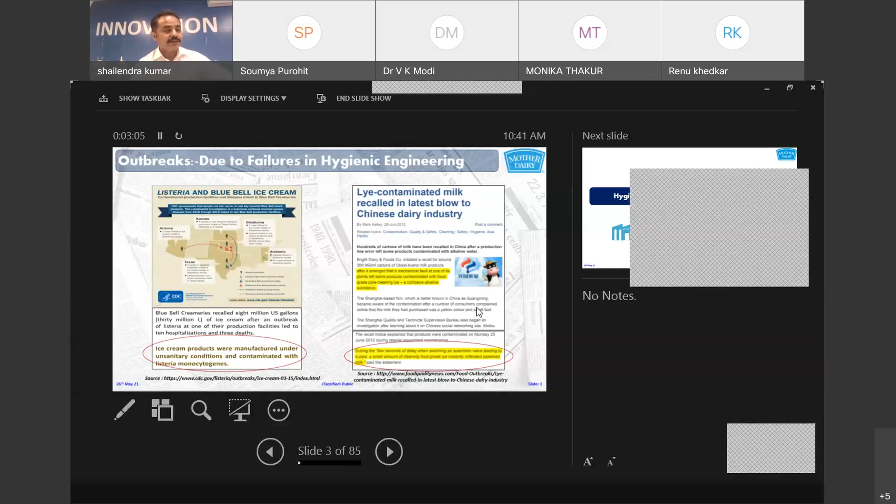That's why this is very important. Now talking about hygienic building design for food factories - first of all we look for the location and the surroundings. It should be away from environmentally polluted areas, industrial fumes, excessive soot, smoke, dust, biological emissions, pollutants, etc. It is very important, when selecting a location for an industry, especially a food factory, to see the surrounding areas as well.

We have to see the groundwater quality, since water will be used in the food industry, so groundwater quality should be tested. It should be tested for complete IS 10500 requirements - physiochemical, microbiological, as well as contaminants which cannot be tested easily at the labs of any food factory. Those samples need to be sent to BARC lab, the Bhabha Atomic Research Center, for testing of those pollutants.

Now looking at the exterior site structure - landscaping and vegetation. Although vegetation is generally important, when it comes to a food factory, vegetation should not be there because it poses harborage to pests and rodents. If vegetation is there, it should be at least 9 meters away from the building.

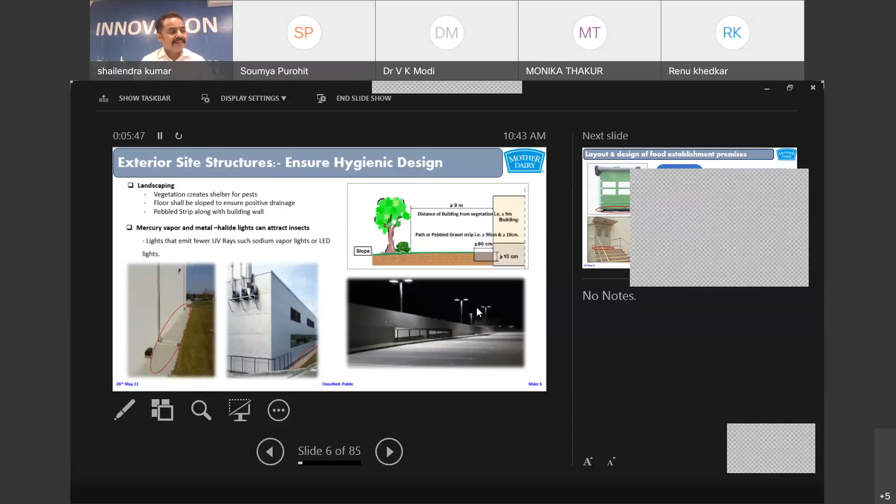As far as outside lights are concerned, we should use lesser UV ray emitting lights like sodium vapor lamps or LED lamps, because other lights like mercury vapor lamps or metal halide lights attract insects.

All doors and windows should be pest proof. There should not be any holes in the exterior walls - normally walls are safe, but entry points like doors, windows, exhaust fans, air intakes, and pipelines coming from outside into the factory building have the possibility of crevices, holes and gaps. Those should be properly sealed. There are proven designs in place, like strips at the bottom of doors, high velocity air curtains on entry points - windows as well as doors - and PVC strip curtains, overlapping strip curtains to allow mobility as well, because you cannot always keep the door closed. When people are entering or material is coming in, we should have overlapping strip curtains to avoid external air and external contamination, and pests creeping into our factories.

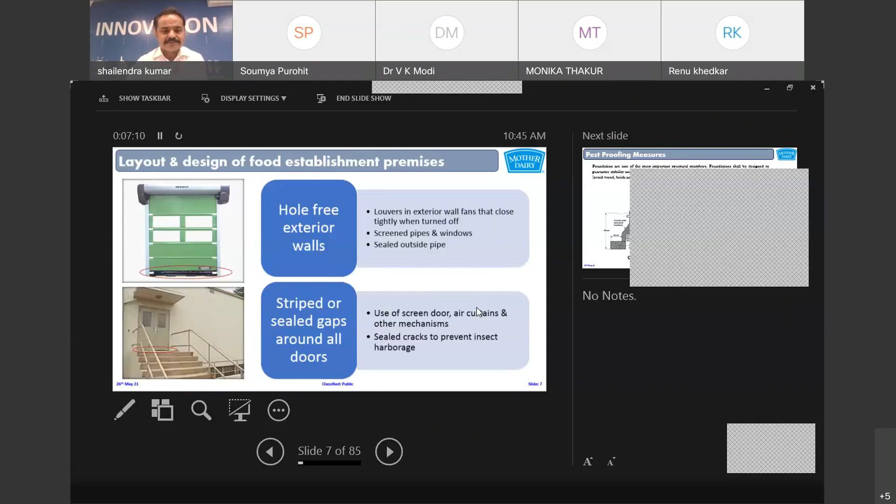Now, this is very important and sometimes ignored. Like the foundation, when we make foundation, it has to be a proper concrete foundation with concrete footing. In absence of concrete, if some people have wood, brick, or other kind of block foundations, there is a possibility of rodents burrowing through those and getting entry into our factories. So this is very important.

Now, there are pipelines which are coming from the different floors of the factory, going like drain pipes down into the gutters at the ground floor level. So there is a possibility of rodents entering through those pipelines. This is one of the devices which we call a rat stop. This device has a sieve and mesh inside, and it allows the necessary amount of liquid to flow down, but it will not allow any rodent or creeper to move up into the factory.

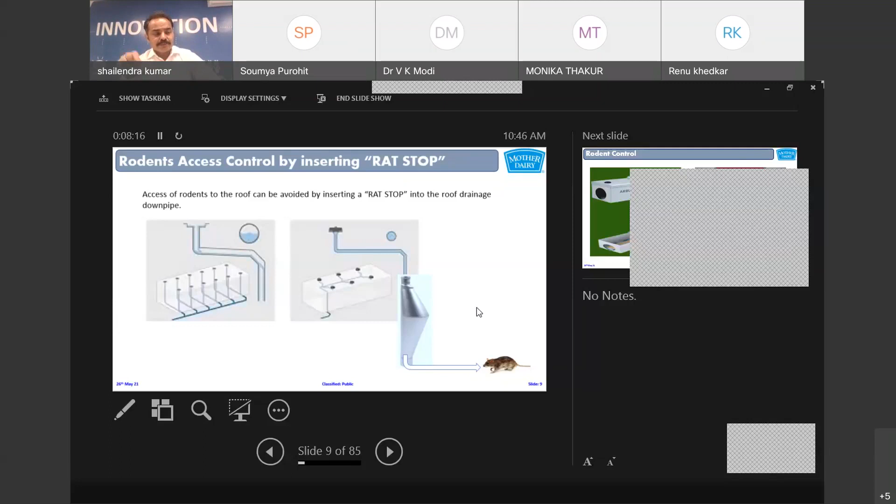Now, on both sides of the entry doors of any factory, we should have rat traps. We call it a rodent box. Inside the rodent box, there are glue traps which can catch the rats if they come.

Other than this, there should be a first line of control for the pest. That first line of control is along the boundary wall, inside of the boundary wall of any factory. Then there will be a second line of control, which is along the building of the factory. Outside there is a boundary wall, and then inside there is a building. So I am talking about the peripheral boundary wall. There we should have these kinds of rodent traps, which can take care of the rodents at the first place.

So we want to exclude the rodents and other pests. We don't want them to come into the factory and then trap them. We want there to be pest proofing, pest prevention. Pests should not come into the factory.

Now, why am I emphasizing this? Because this is proven science which we have learned from the American Institute of Baking. They are the pioneers in GMP and housekeeping and food safety inspection all over the world. This example has been quoted by them.

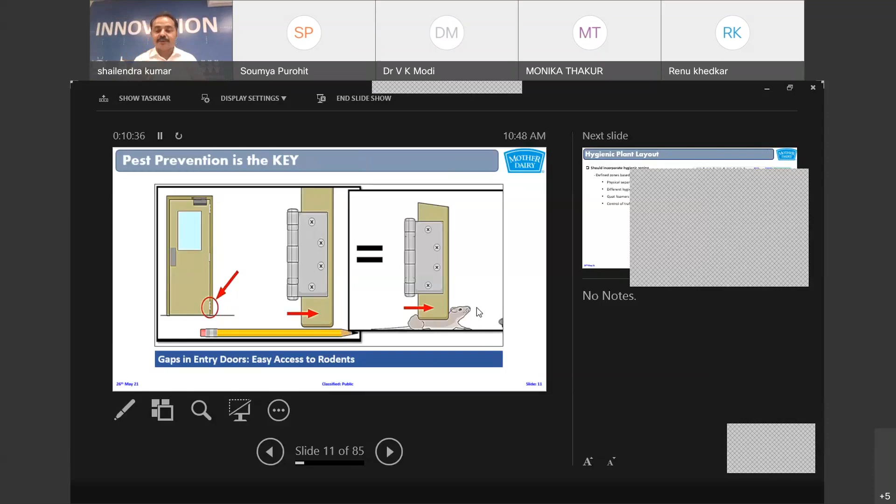Now, talking about the hygienic plant layout, it's a small animation. If you see, in the food factory, when we enter through a corridor, first it will go to the laundry hatch for cleaning store, and then the employee can go to the washrooms, then to the lockers, wear hairnet, then boot wash, hand wash, hand dry facility, and then they can wear PPE, and then enter through automatic double doors into the factory.

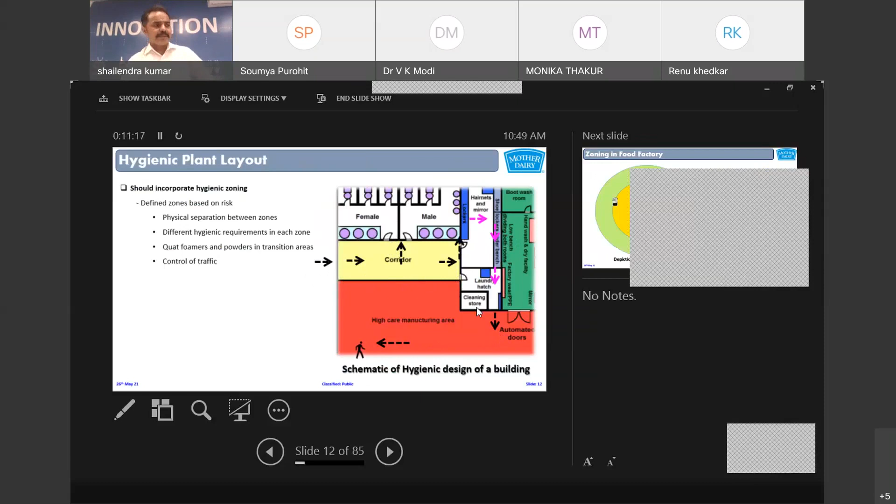So separate zones are made. Now, why are zones important?

Because if you see this slide - I'm sorry, I have not - are the slides visible to all? Yes sir, okay thank you. Yes sir, because that visibility is important, otherwise I may keep speaking.

Now, critical zone is the zone which is most important, where we process and pack our food, where the highest level of hygiene is required. So we want to protect that zone. That's why that zone is in the inner core of the factory. Now, the door of that critical zone should not open to the environment. Not only the environment, it should not open to the clean zone also. So all the doors of the critical zone should open to the control zone.

Control zone is the next level of hygiene, where we have other processes like water treatment, storage facilities and other things. So none of the critical zone door or window should open to the clean zone or the environment directly, right?

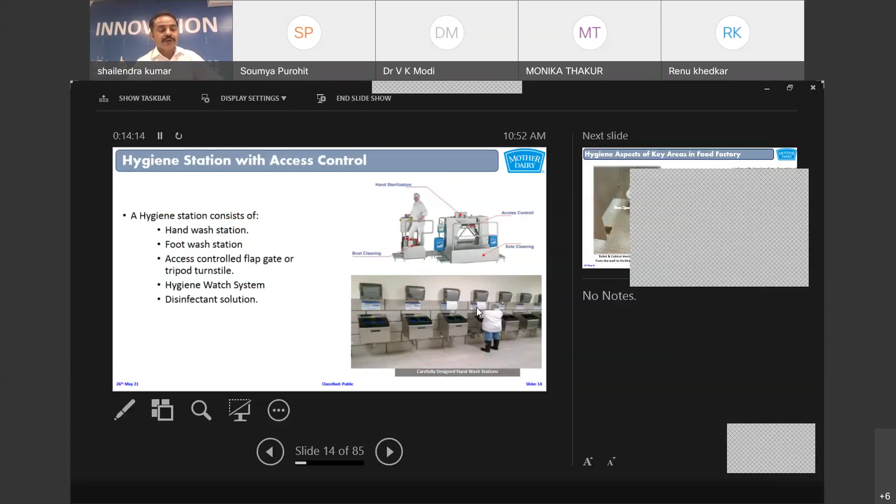So these are some examples of good hygiene station and access controls. Nowadays, they are available with boot wash, hand wash facility, hand sanitizing, and they will also have access control. These are a few examples of good hygiene practice - all building design part.

Now this is the most area which is always left out - like the roof, people do not go to the roof normally. They go inside the factory, offices, processing halls, packing areas, storage areas, and then they come out. But these are the most neglected areas - the roof, where if it is not proper, if it is a gravel roof, some pits are there, because with the passage of time this pitch and gravel roof can generate those kind of pits, and waterlogging can be there and contamination can come.

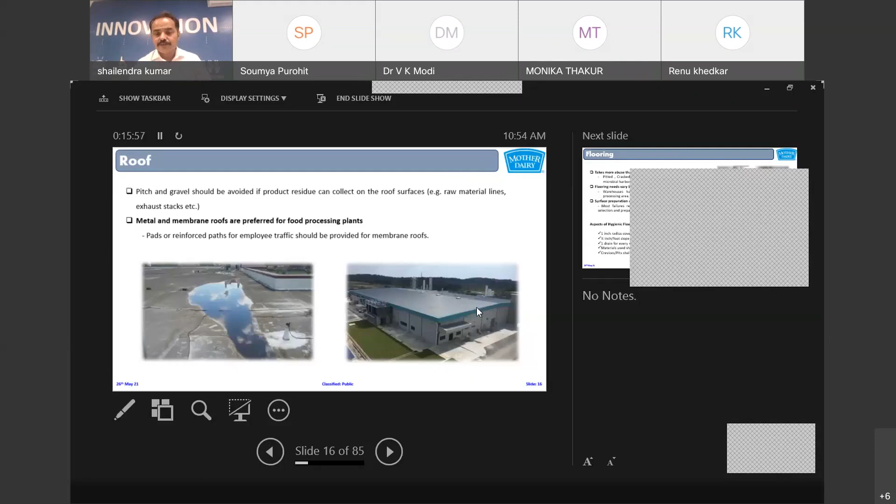Now talking about the flooring, it is very important to have a good floor, because the floor is the one which takes most of the abuse in the plant. All the equipment, machinery, people all walk on the floor only.

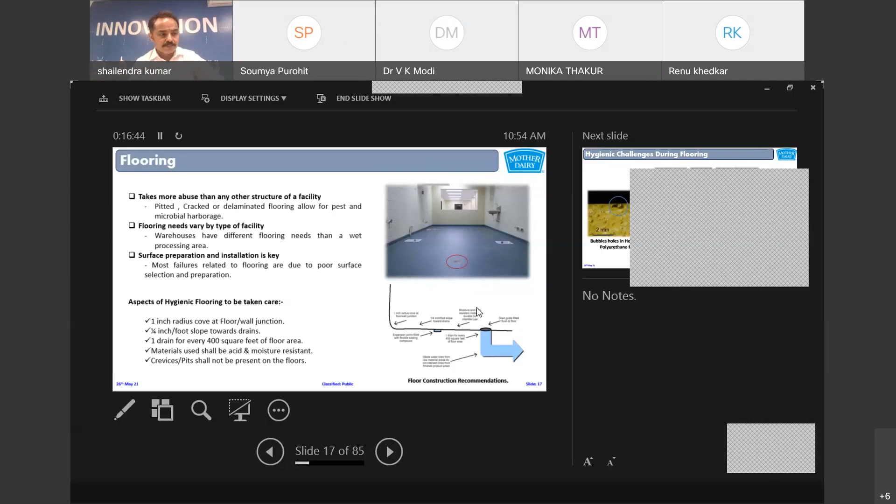Now talking about the floor, it should have a 1 inch radius cove at floor to wall junction - that coving is important. Second, there should be a 1/4 inch foot slope towards the drain, so the floor should be sloped towards the drain. There should be one drain at every 400 square feet floor area. Crevices and pits shall not be present on the floor. So it is very important to have a floor of proper design.

So we have to select the proper vendor also, who can give the proper material, proper design, and who has proper knowledge about that flooring. So then only we can get the right kind of floor, which can avoid the cross contamination from the floor, breeding of contamination at the floor.

Now, one more important point is the junction of the drain and the floor is very important, because at that junction most of the damage occurs, and then water creeps into the tiles or the PVC flooring, and then micro contamination and other contamination starts inside the floor, which is not evident from the top.

Elevated structures are very important because there are product zones below them. Suppose there are lines going with different temperature products, so there can be condensation which can fall into the product zone.

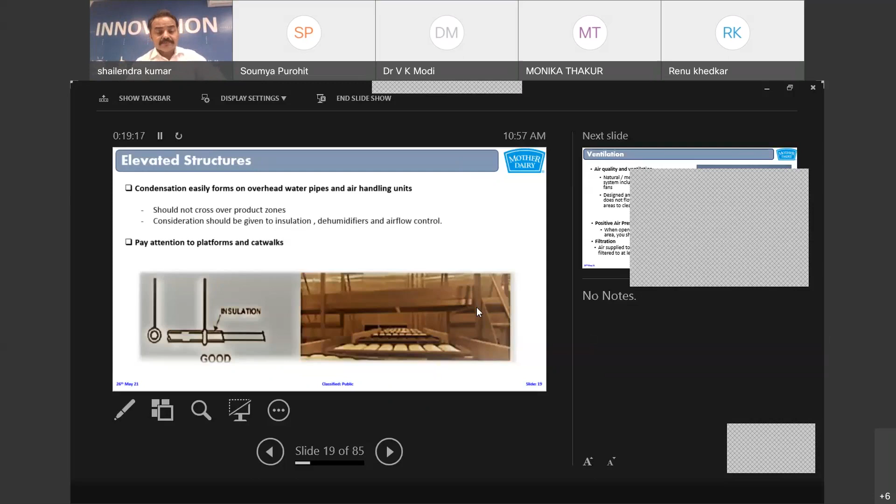Now coming to ventilation. Ventilation is very important. We have closed the factory through walls, doors and windows, but how do we bring proper ventilation in?

There should be, on the opposite end of the building of the factory premises, various types of requirements depending upon the kind of food product we are making. Suppose we are making baby food, then there is a different kind of requirement, and there is a HEPA filter for the incoming air.

But normally in a general food factory where that kind of high hygiene requirement, clean room standard, is not there - there are different clean room standards for air intake - normally we have a 50-micron filter. All incoming air should be filtered through 50-micron, and there should be one way in and it should go out from the other end of the building. So there should be proper ventilation in the factory. This is the general normal thing I'm talking about.

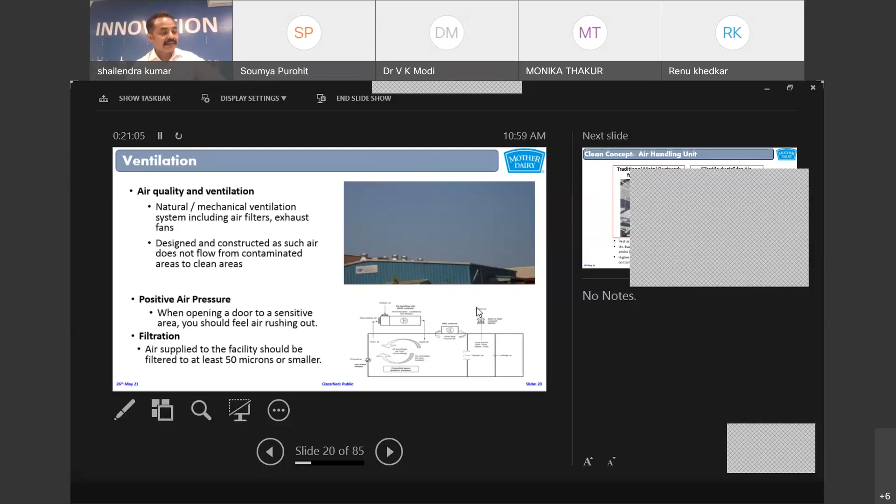Now we can have a positive air pressure depending upon the food product. Like if we are making UHT products, we should have positive air pressure inside the processing hall, and the air coming in should come through a HEPA filter. Why positive air pressure? Because if there is negative air pressure, whenever you open the door of the processing hall, the outside contaminated air will gush into the system. That's why positive air pressure is required inside the processing hall or packing areas.

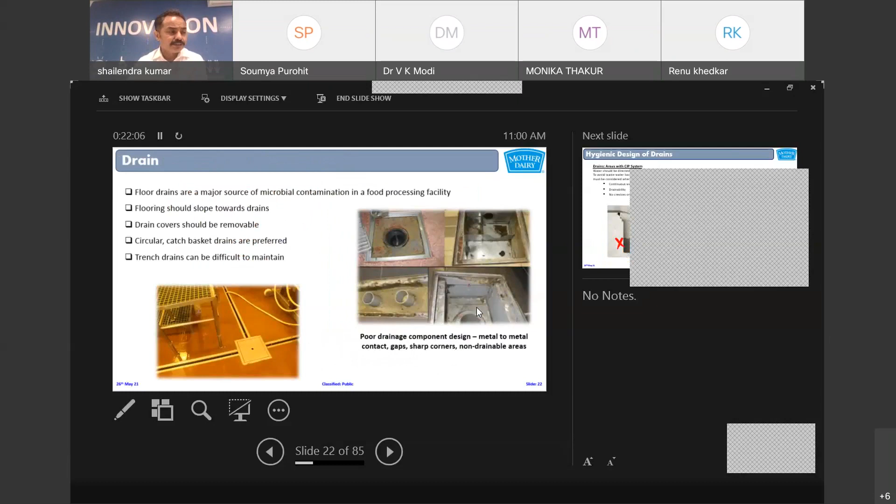Drains are very important. Drains are the areas which take all the filth, all the load, water, everything, and it goes through them. I will talk more about drains. I have a small video also to show you the hygienic design of the drain.

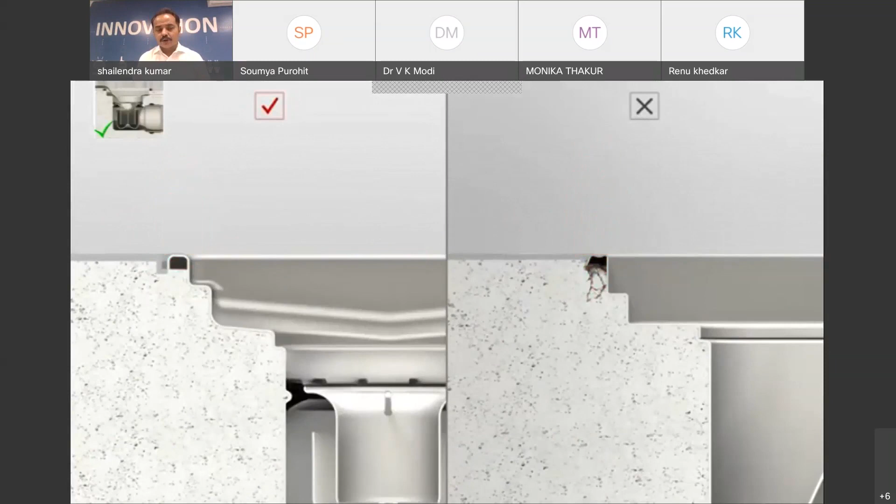So it is sloped towards the drain, that is hygienic. On the left hand side it is a hygienic design; on the right hand side it is unhygienic. Now if you see the junctions where the metal and the floor meet, it should be able to bear the load, because most of the time that gets damaged, edges get damaged, and water creeps in.

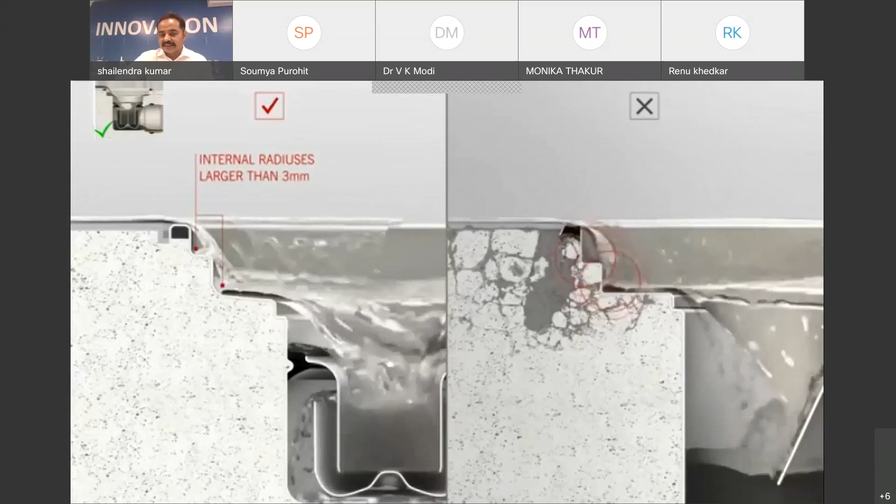The design of the drain should have an internal radius larger than 3 mm, so that no debris can stay there. Again, this part also, where the floor and the metal part are meeting - it should be a hygienic joint, no metal to metal joint should be there.

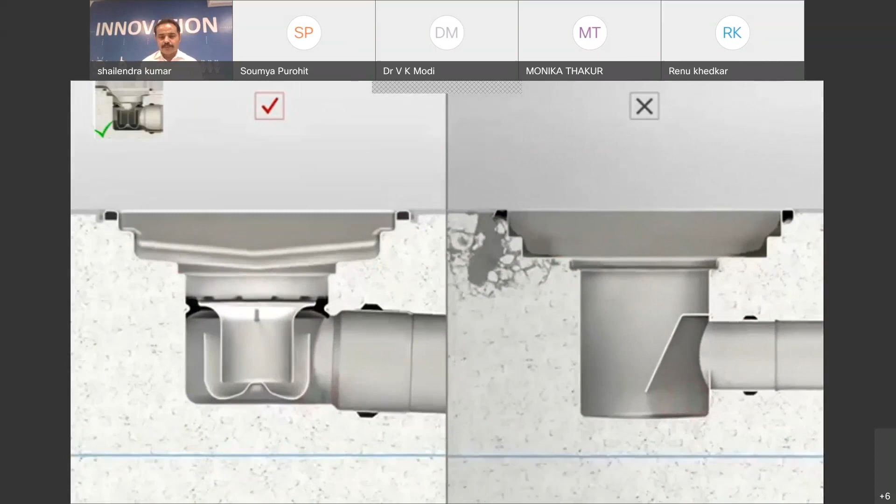Now looking at the bottom part, you see there is water accumulation at the bottom, on the left side and on the right side. On the left side, it is fully drainable.

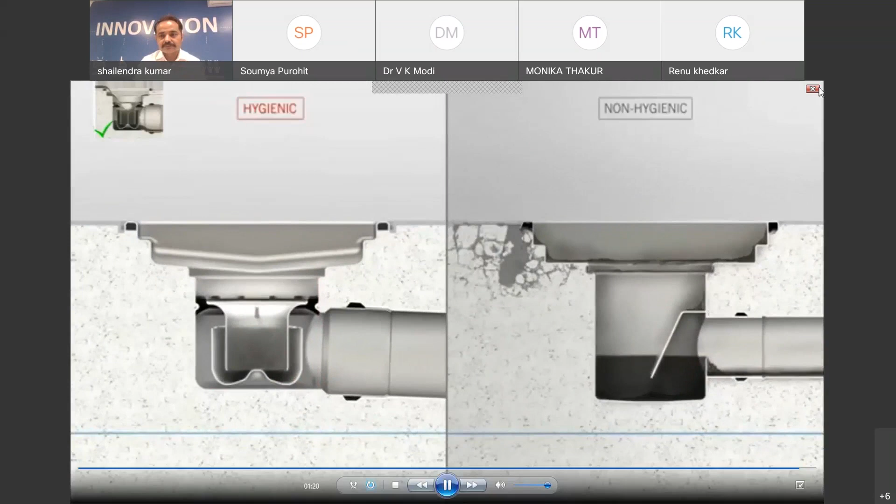Normally in areas where CIP cleaning in place happens and a lot of water comes at one point in time, these kinds of drains are there. These are hygienic drains with a water sealing device inside, so that no contamination through the final drain comes into the processing areas.

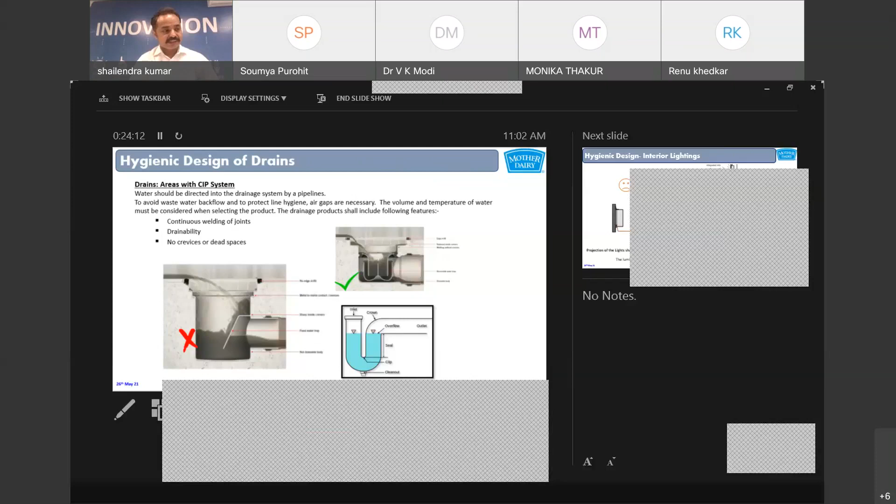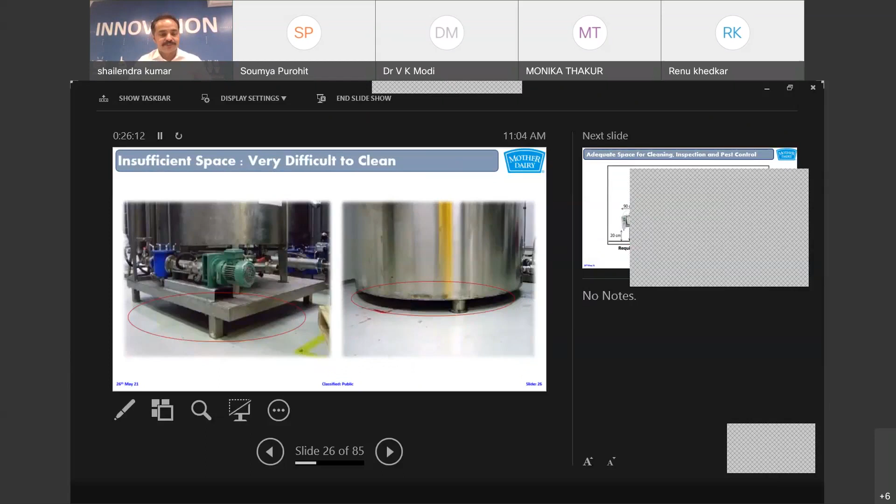These are very difficult to clean areas because there is no space left underneath those equipments. So what is the right kind of distance from the floor? Depending upon the width of the equipment, if the equipment width is 90 centimeters, the distance from the floor should be 20 centimeters minimum, so that easy access and easy cleaning and inspection can be done. Similarly, different sizes of equipment require different distances from the floor.

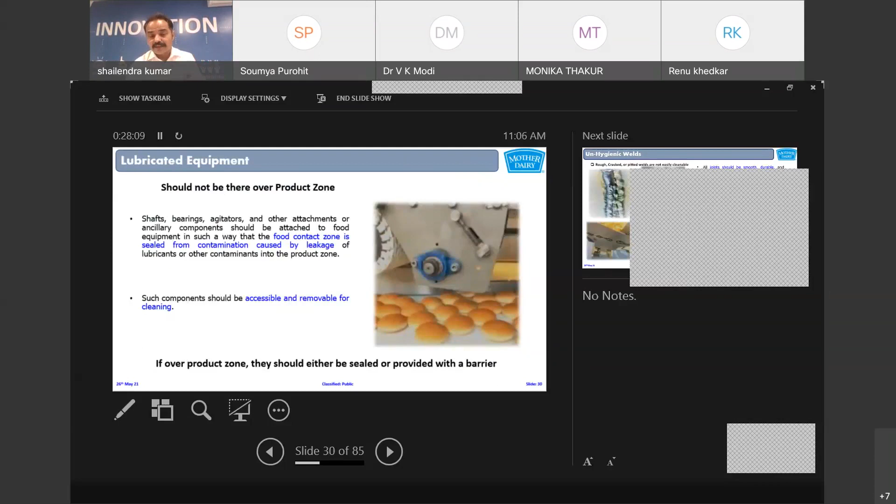Lubricated equipment should not be there on the product zone. I've told you about the product zone - sometimes there are equipments where some shaft or movable parts require lubrication. So we should design our equipment such that the lubricated part is not just above the product zone. And if it is there, it should be protected properly with a barrier.

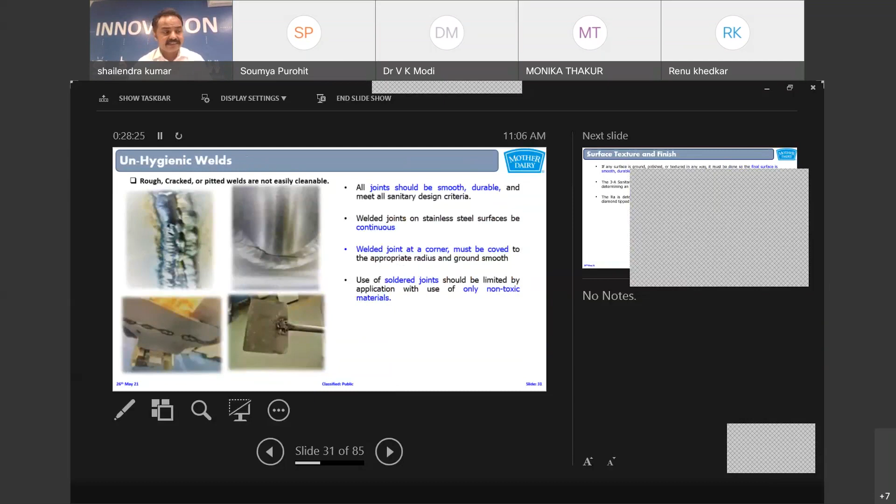Hygienic welding is very important because welding is an integral part where stainless steel or other things are used - mostly stainless steel I am talking about. So welding joints will be there. What is the requirement for welding joints? It should have a surface finish of 0.8 RA. RA can be determined through an instrument called a profilometer. In normal words, the welding joint should be very smooth, the surface should be very smooth.

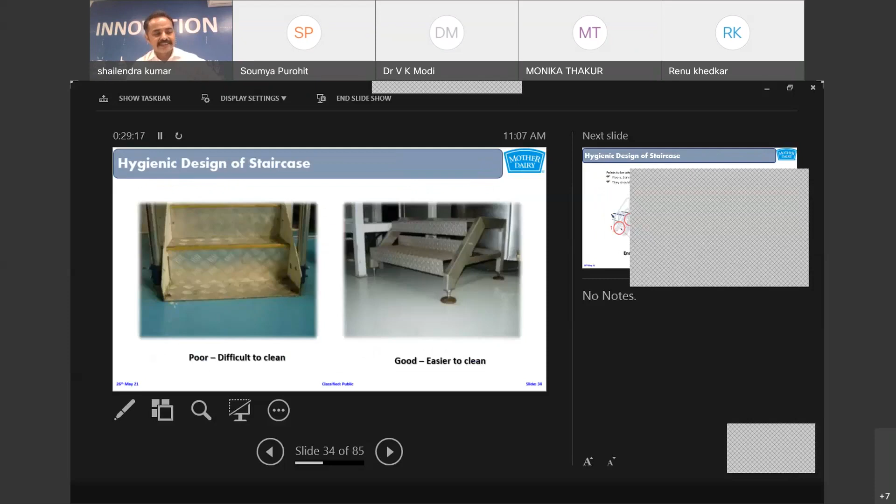This is a classical example of a product zone. Suppose there is a staircase above the product zone - the person is standing on a staircase, and below that, product is moving. If you see on the right hand side, there is a solid green plate on the floor, there is a kick plate on the sides because sometimes items can fall from the side also, and the staircase is encased properly. This will prevent dust, dirt, and harborage of insects, etc.

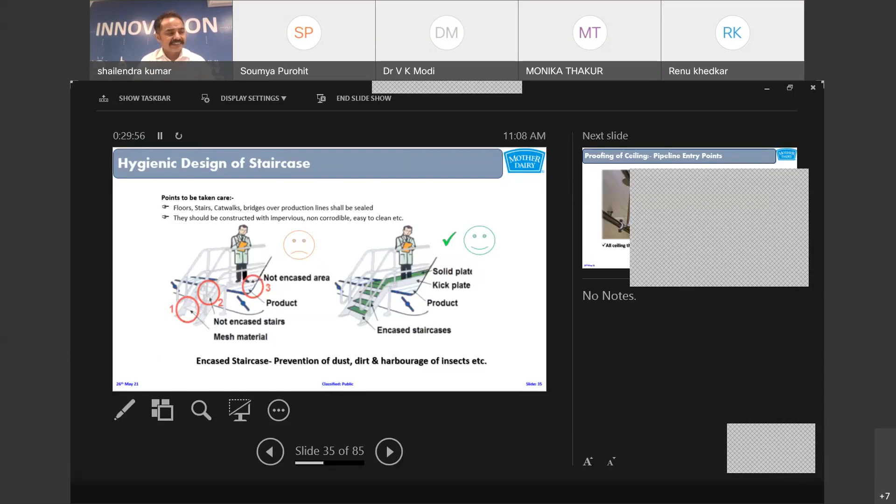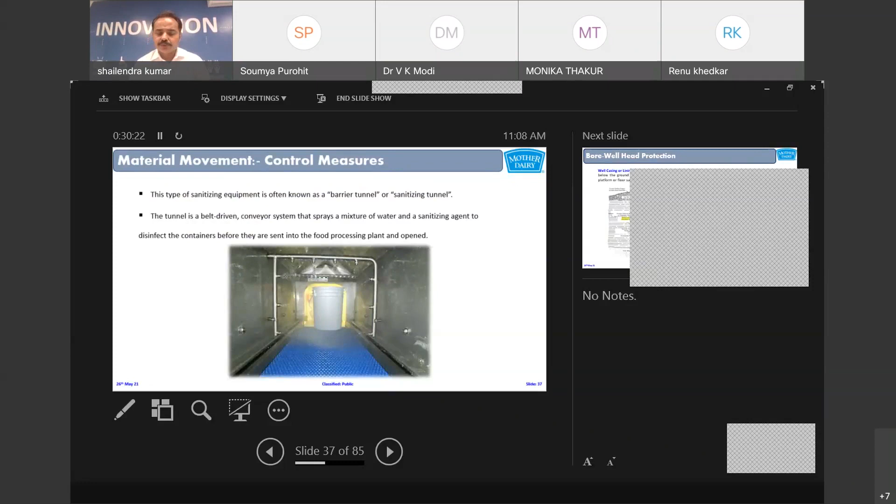Any material which is coming into the factory should pass through a sanitizer tunnel or barrier tunnel, where we can use any sanitizing agent as per the requirement.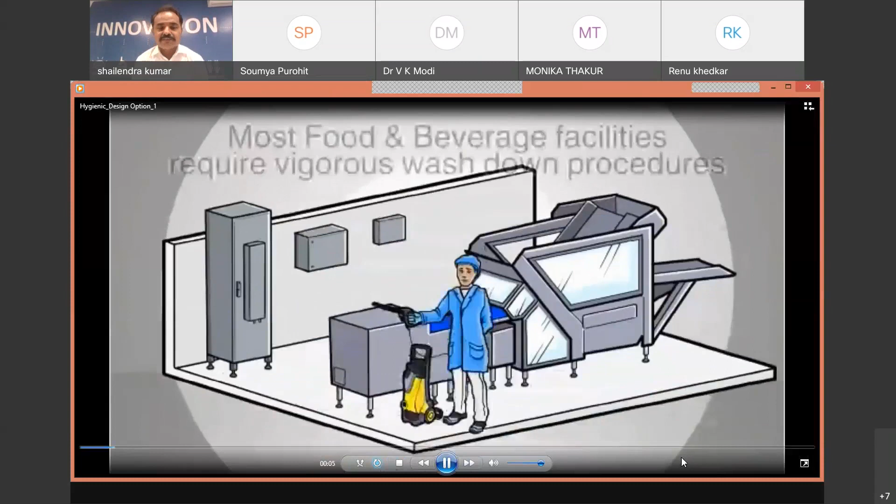Now, summary - I have a small video on summary of building design. Whatever I have told, this video covers everything, most of the things. You can just see.

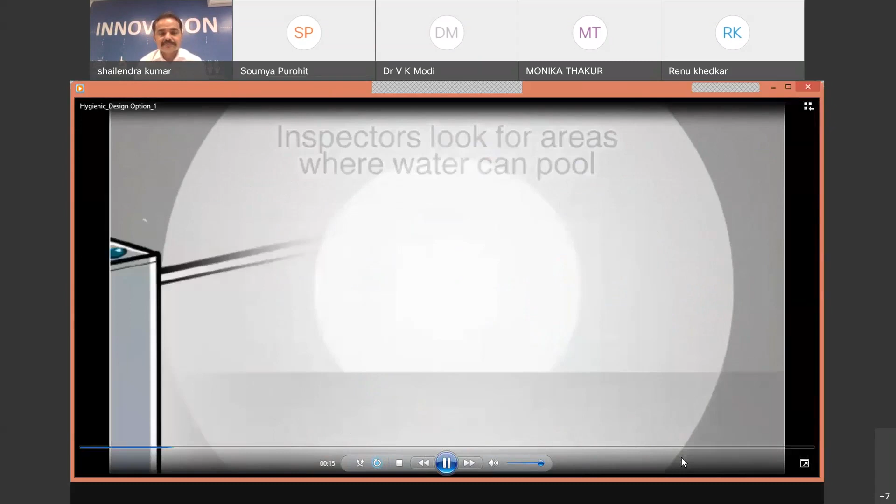So these are the places where bacteria can harborage. Now, this is not the right design. If it is properly sloped, nothing can stay there, and it is easily cleanable also.

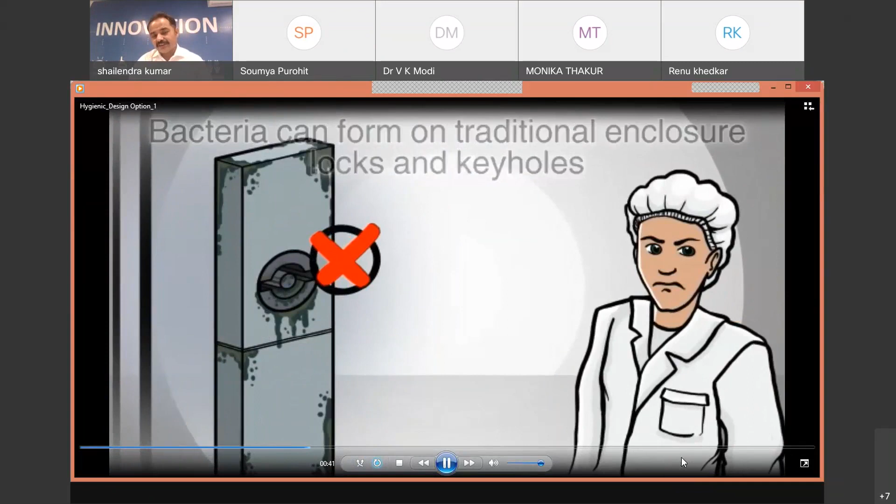Another example of any lock - this lock is having a harborage area. Now this is not, because nothing can go inside, it will come out, run off. This is another way of showing it.

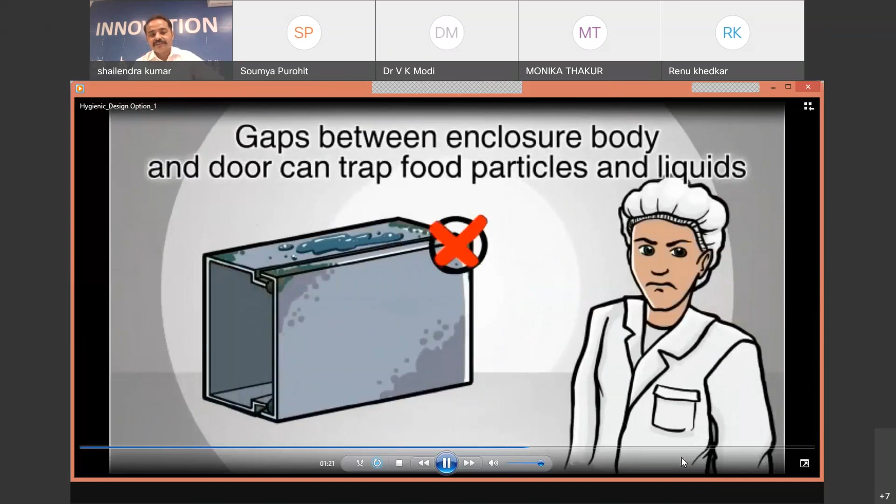Now these gaps in between enclosure body where the liquid can get trapped - it should have a silicon rubber gasket to eliminate the gaps.

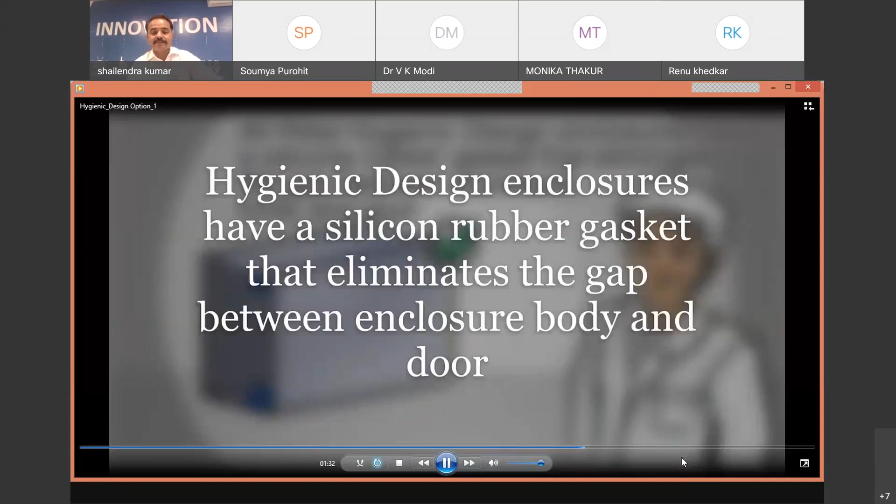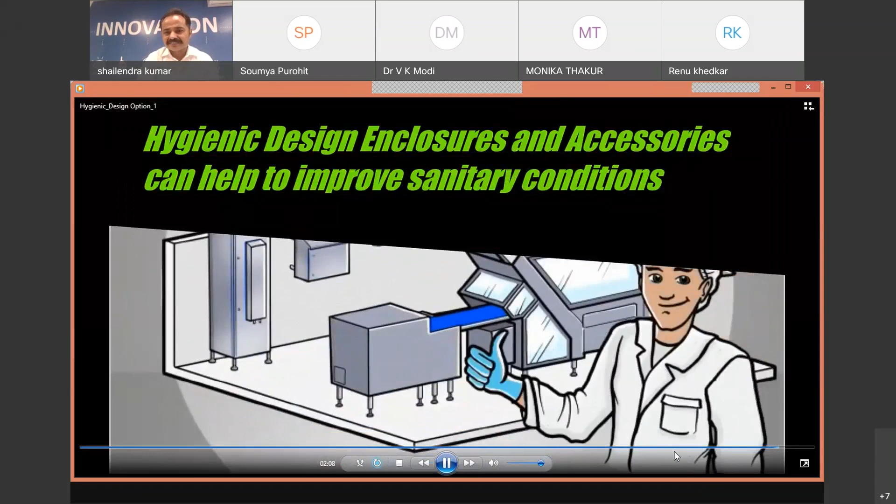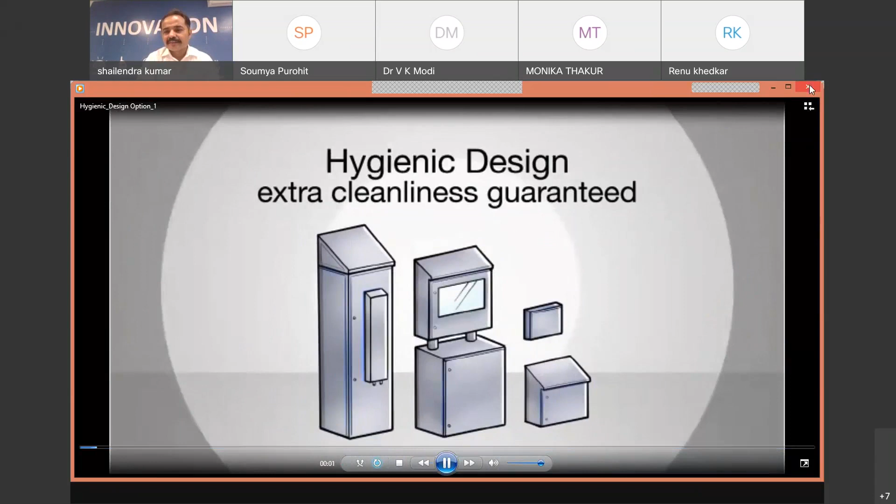Moving forward - EHEDG, that is European Hygienic Engineering Design Group, and 3A, they are the global standards for hygienic design. We can always refer to them.

At Mother Dairy, Corporate Quality Assurance, where I am working, we have a small team, and we have studied most of the international and national standards on equipment and building hygiene design for food factories, and we have tried to incorporate most of the things in our plants and other areas in the complete value chain, because not only the plant, there is a back end from where we procure things which goes into the processing plant, and then from the processing plant the finished goods go out of the factory to the distributors, CFAs, retailers. So the complete value chain has to be taken care of. We have to design and develop the requirements, quality and food safety requirements for the complete value chain.

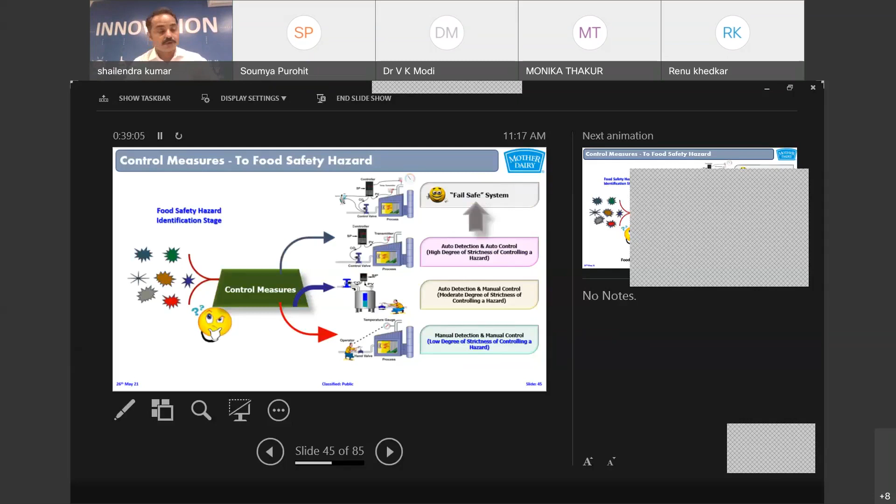Now as far as the pasteurizer is concerned, a few of the requirements of a best-in-class pasteurizer include the pasteurization CCP with a fail-safe mechanism controlled by a double temperature sensor. I said nothing can go wrong when we talk about fail-safe.

So if a pasteurizer has one temperature sensor showing a certain temperature, and based on that the diversion of unprocessed milk happens or the forward flow of processed milk happens - in the pasteurizer, if the required temperature is attained, the milk goes to the pasteurized milk silo for filling and packing, that milk is okay. But if the temperature is not met, it will go back, diverted to the balance tank of the pasteurizer for reprocessing.

So now, in case this automation is there but the temperature sensor is wrong, what will happen? If the calibration of the temperature sensor is wrong - suppose the requirement is 80 degrees and it is showing 75, or it is showing 80 but actually it is 75 - that kind of problem can come.

So to make it fail-safe, we have put two temperature sensors at the same place at a small distance, so that whenever the operator starts pasteurization, he will see both readings. If both are showing the same temperature, it means it is correct, because it is highly impossible that both will go wrong towards the same side. That is the kind of fail-safe mechanism.

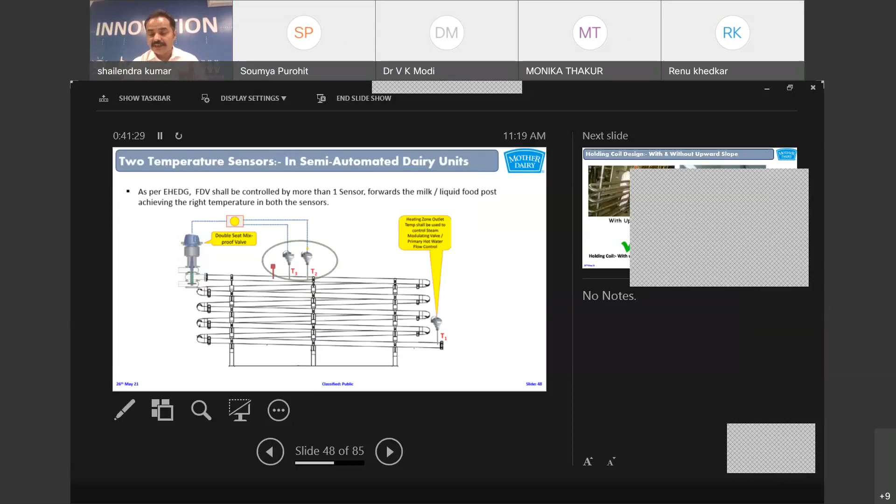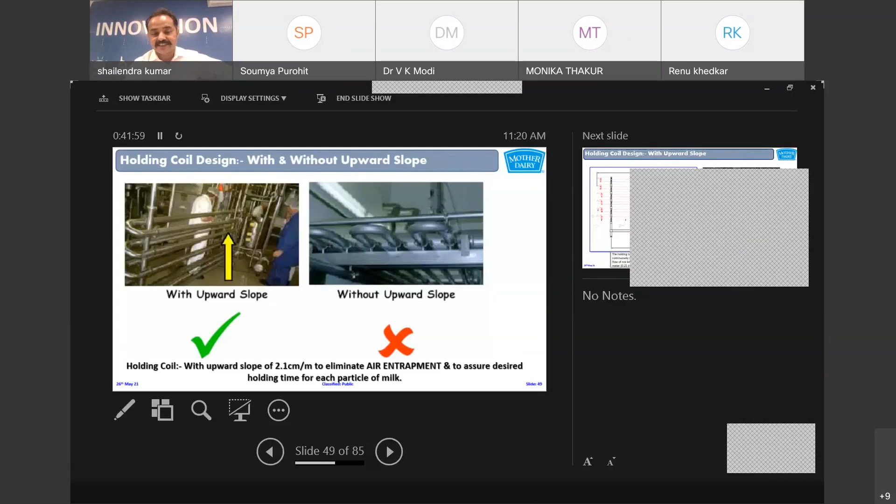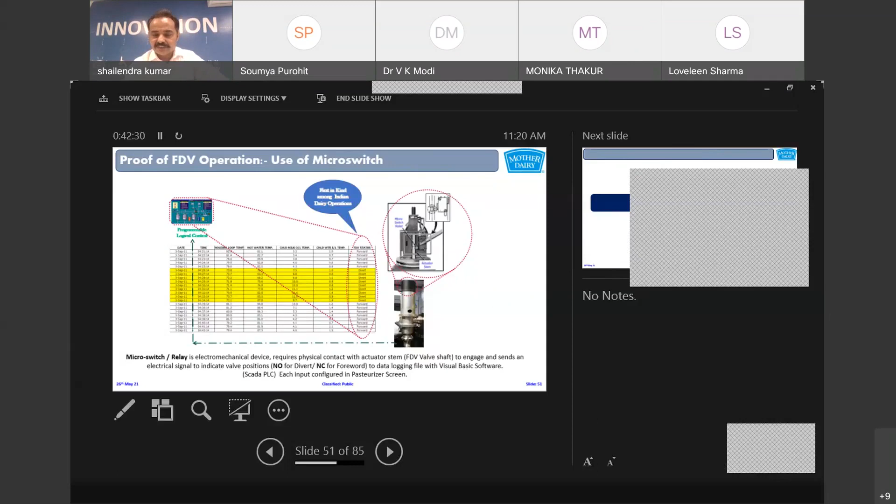Now this is the FDV, the flow diversion valve, which is very important in the pasteurizer. So how do we know when there is a diversion, what temperatures are there, what time is there, what flow is there? We have to have a continuous data logging system, and we can view it through SCADA monitoring.

Now the next topic is prevention of cross contamination. Time is less, so I will move slightly fast.

In earlier times there were three-way valves to connect the pipelines and tanks, because milk or other liquid food all travel in the pipelines. To eliminate the three-way valve, because three-way valves are not good, they can cause cross contamination and are not easy to clean, we use flow plates where physical separation is ensured. This is a journey from three-way valve to flow plate system, and now the flow plate system is also very cumbersome for dairies handling high volume of liquids or milk.

So there we talk about the valve battery system, which ensures automated physical separation and continuous functioning of the process. One line there is CIP happening, one line milk is going, one line water is going. This can be automatically ensured through the valve battery system.

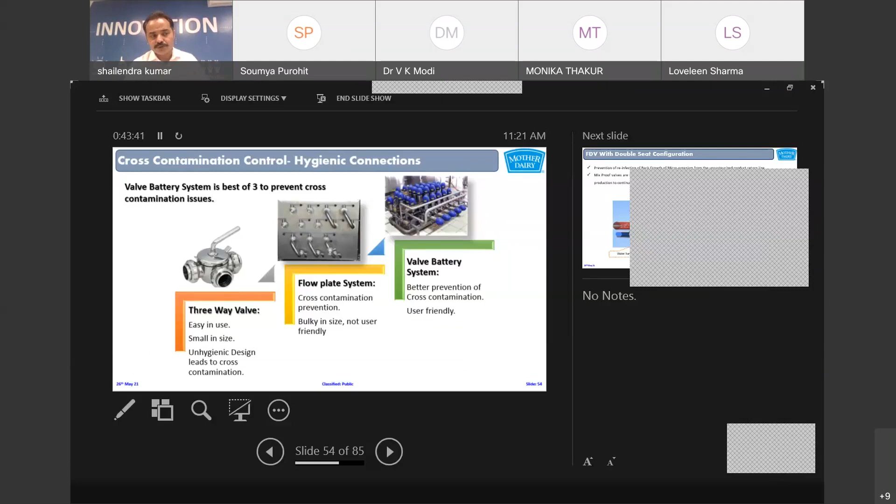Now in the valve battery system, what is important is the design of the valve. Because on one line, if you see this picture, on the upper line red color liquid is going, on the lower line blue color liquid is there. So there is a possibility of cross contamination if the valve design is not correct. If you see, in between those liquids they are separated by a seat and a seal.

Here the valve design which we are suggesting is a double seat mix proof pressure balance valve. When we say double seat - if suppose one seat's seal gets cut, there is a possibility of cross contamination. So we talk about double seat and double seal, and then this becomes a mix proof valve. If there is any leakage, it will be visible through the center part, which will show the liquid coming down, but it will not cross contaminate. The operator can take care of it once the operation is over.

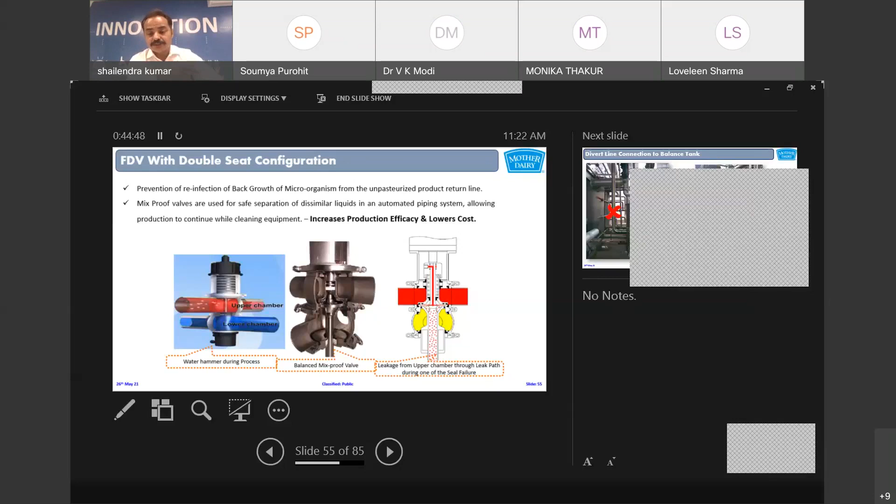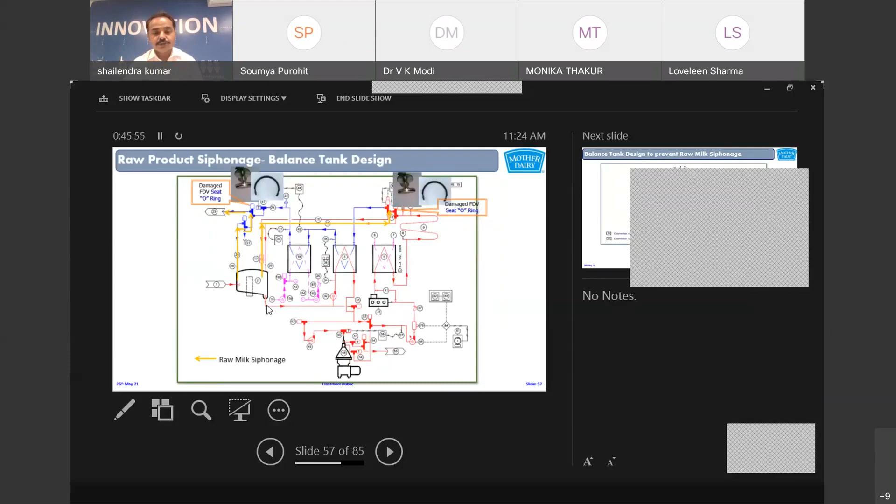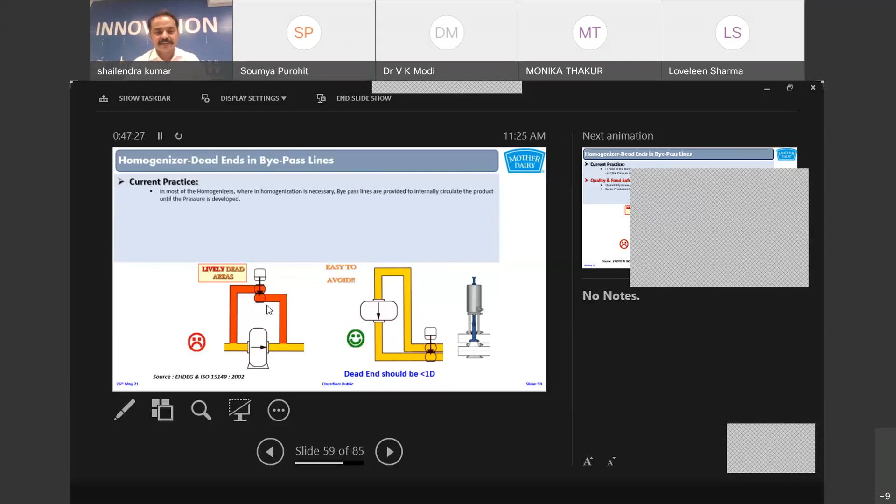On the right hand side, if you see, that valve is placed hygienically and there is no dead end. So if a dead end is there, it should be less than 1D. This is a live example - on the left hand side, there is a big dead end on the circulation line, and on the right hand side, it is being corrected by placing the valve in the correct position.

Now the other part is the cross contamination control in the pasteurizer. A pasteurizer is a plate pack arrangement where the liquid milk or the product is separated by a cooling or heating medium through a thin plate.

That thin plate is very small, like 0.6 mm in thickness. So what can happen? Suppose there is a pinhole in that plate. If the pressure of the cooling medium or heating medium is higher than the product, it can creep into the product, and nobody will know, because we cannot open that plate pack arrangement, the PHE, every day.

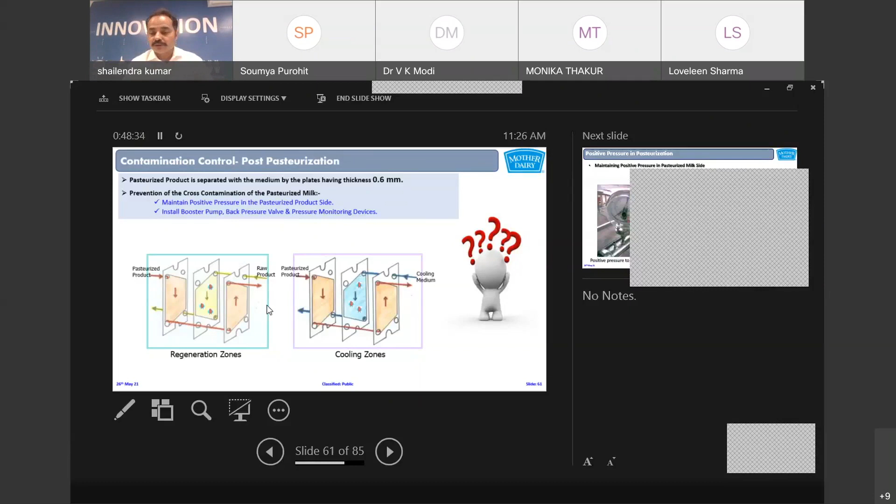So what is the way out? The way out is to provide positive pressure on the product side. These are the monitoring equipments where we can see the positive pressure, and it is linked to the SCADA also, where we can monitor. Afterward also we can see what went wrong, what went well.

Now moving to the next topic, cleaning in place. CIP is the most important part, if we say, in the complete processing area. And we talk about 5T technology.

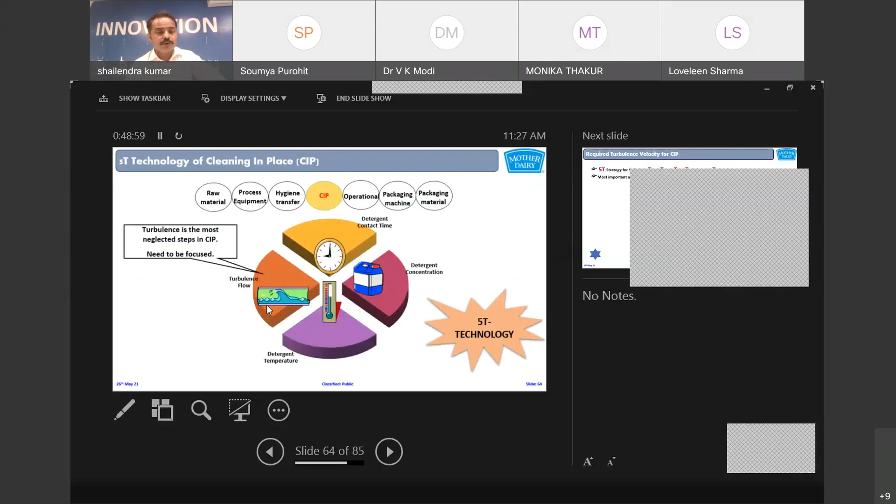In 5T, time, temperature... May I interrupt, sir? Can we finish within time? Yeah, I will, give me 5 minutes I think. 5 minutes are there? It's already 11:30. Okay, please, okay.

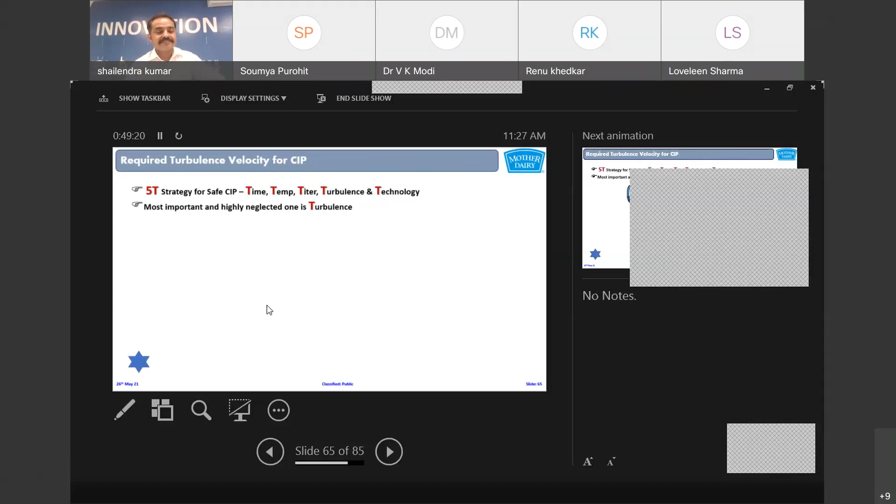So time, temperature, titer, turbulence, and technology. This turbulence is very important, which is often overlooked and not given that importance. Turbulence of 1.5 meters per second is important.

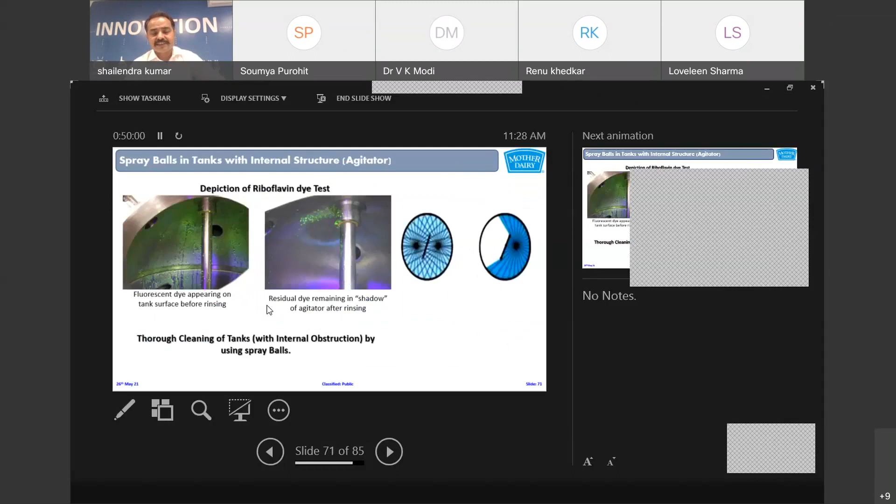The spray ball should be on both sides if there is an internal structure in the silo or tank, because otherwise there is a possibility of a shadow area and not getting proper cleanliness. We talk about static spray balls and rotary jet heads also. The rotary jet head is the latest spray ball available, where with less time, less temperature, less chemical, with impact cleaning, we can get the desired cleaning.

Because time is not there, I am stopping here. Thank you very much for inviting me and allowing me to share my experiences. Thank you.

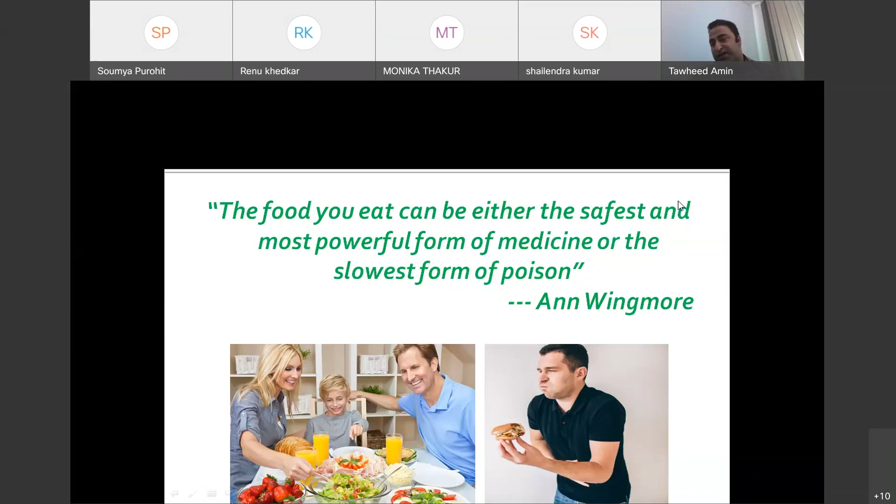That is why food safety is very important. That's why we need to have stringent rules and regulations in place, implemented in letter and spirit, so that the food that reaches the consumer is safe and wholesome.

Now, to keep a close vigil and ensure safe and wholesome food reaches the consumer, the Government of India came up with the Food Safety and Standards Act 2006. It was enacted in 2006, but the rules and regulations came up in 2011, and it got implemented from that time. The purpose of this act is to consolidate the laws related to food and establish the Food Safety and Standards Authority of India.

Actually, we had various laws - FPO, meat and meat products order, milk and milk products order, edible oil orders - different orders. So in order to avoid that haphazardness and ambiguity, the government thought we should bring all these regulations under one umbrella, the Food Safety and Standards Authority of India, and modify our rules and regulations so that our products can go into international markets.

That was the biggest problem we were facing previously, but now we are competing in the outside and international markets. Still, a lot more needs to be done, but we are competing with those. And all the regulations or standards released by the Food Safety and Standards Authority of India from time to time are all science-based standards.

That means if they tell you that you need to add 0.50 mg per kilogram of any food additive, it's all based on science, experimentation, and observation. It's not arbitrary - they have scientific committees which work on, focus on, and study these things, and they recommend the standards which are released and which are to be followed by the food industries.

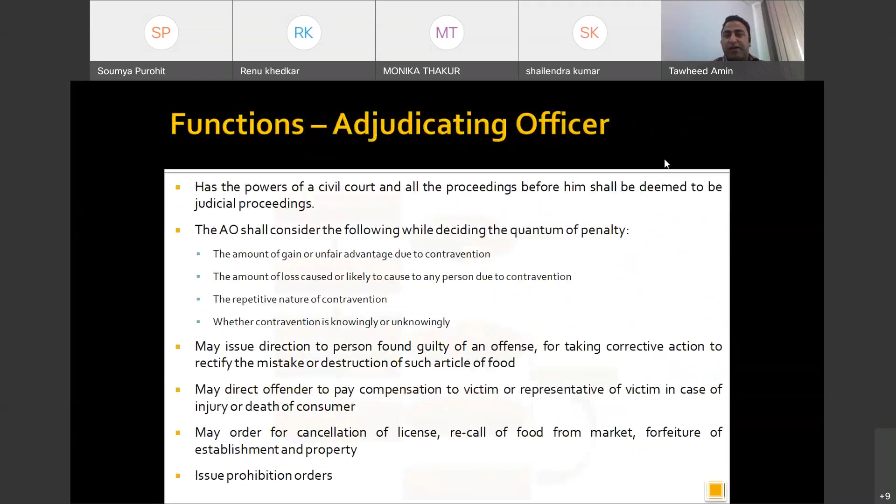These are some of the activities. I will not discuss much about this - I will go straight to packaging and labeling. I think that's very important, so I need to discuss it.

Let's first focus on packaging and labeling. This is Section 23 of the Food Safety and Standards Act 2006. According to this section, no person shall manufacture, distribute, sell, expose for sale, or dispatch or deliver to any agent or broker for the purpose of sale any packaged food products which are not marked and labeled. So no product should go into the market without marking or labeling, because we should know the identity of the product - this belongs to this particular company, this particular brand - because if tomorrow there is any problem, any foodborne outbreak, we can directly look at the packet and go for the recall or withdrawal of that product.

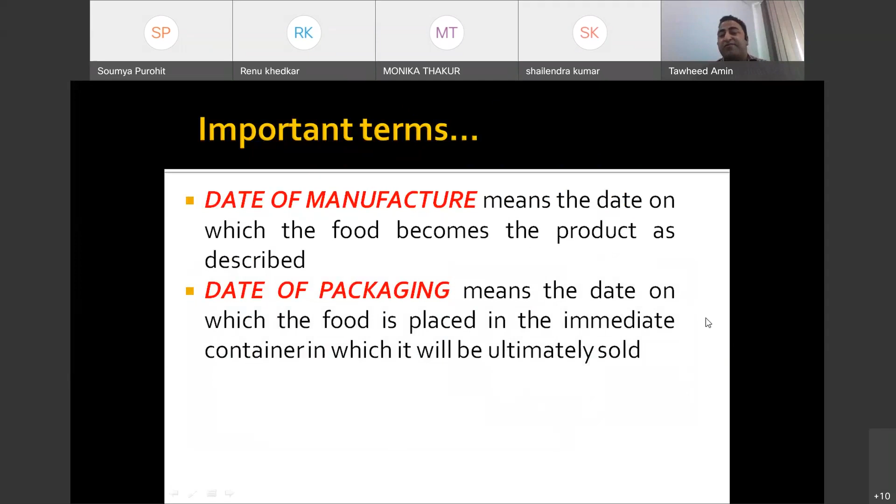Now, the important terms are: number one, date of manufacture; second, date of packaging. Date of manufacture means the date on which the food becomes the product as described - the day on which we are manufacturing that product. Date of packaging is the date on which the food is placed in the immediate container in which it is to be ultimately sold. These are the two terms.

Now, very important, which I'll be focusing on, is the principal display panel. This is actually the area which you see on the packaging material, because when you go to the departmental stores, you go to the shop, you see the products which are being displayed over there.

The area in front of you which is being displayed is called PDP, that is Principal Display Panel. It is that part of a label which is intended or likely to be displayed, examined by the consumer under normal and customary conditions of display, sale, or purchase of the commodity contained in the package. That means it is for the display in front of you.

These are the key parts of a food label. If we talk about the key parts of a food label, the first part is the Principal Display Panel. It is the portion of the label most likely to be seen by the consumer at the time of purchase.

What should be included in the Principal Display Panel? This is as per the Food Safety and Standards Authority of India. It's not that you will just put anything you want. We have rules and regulations about what should be present on that label, which is mandatory. Number one is the net quantity of content, that is the amount of food in the package. Second is the name or identity of the product, like here we have written 'premium' - this can be any brand. Then we should have this amount or weight present, which should mandatorily be present on the Principal Display Panel.

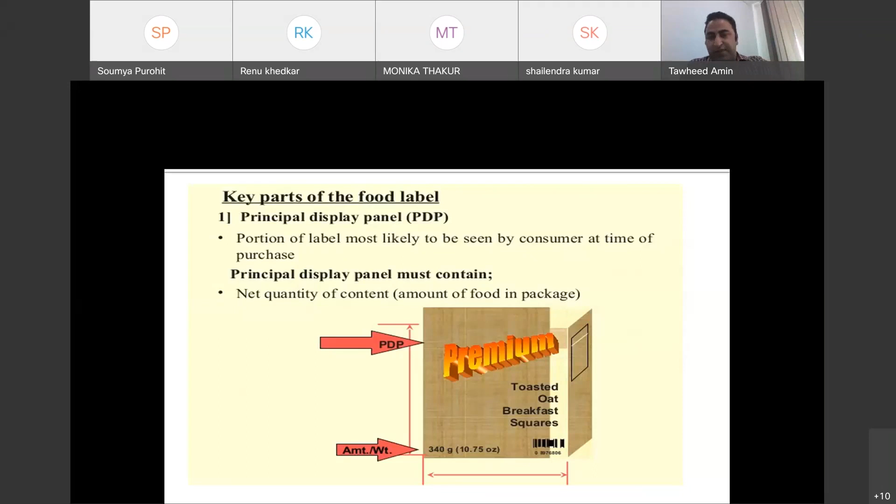This is the Principal Display Panel. As you can see, we have taken a carton. This is any brand, for example let's say Amul or any kind of brand. Then we have the statement of identity, that is, statement of identity means which product is inside - this is cereal based, this can be fruit based, vegetable, beverage, any kind of product. So that is the statement of identity, and that has to be there.

Then net weight, that is the net quantity statement. These two things should be there in the Principal Display Panel as per the Food Safety and Standards Authority of India Act. Now, the manner of declaration.

How should we go about the declaration on the Principal Display Panel? All label information shall be given on the PDP as per the manner of declaration. We have rules set by FSSAI called the PDP manner of declaration, and we have to follow that. It's not that you will cover the whole bottle which is to be labeled. No, there is a certain area which is to be covered as per the rules.

All information required on labels shall either be grouped together at one place, or we can just keep it at different places - that is, pre-printed information would be at one place and online information at another place.

Just like you can see this canned food product - this is a can, we have canned food products available in the market. The area in front of you, wherein we have written 'canned foods', this is actually the Principal Display Panel, because when you go to the market, this is the thing which is visible to you.

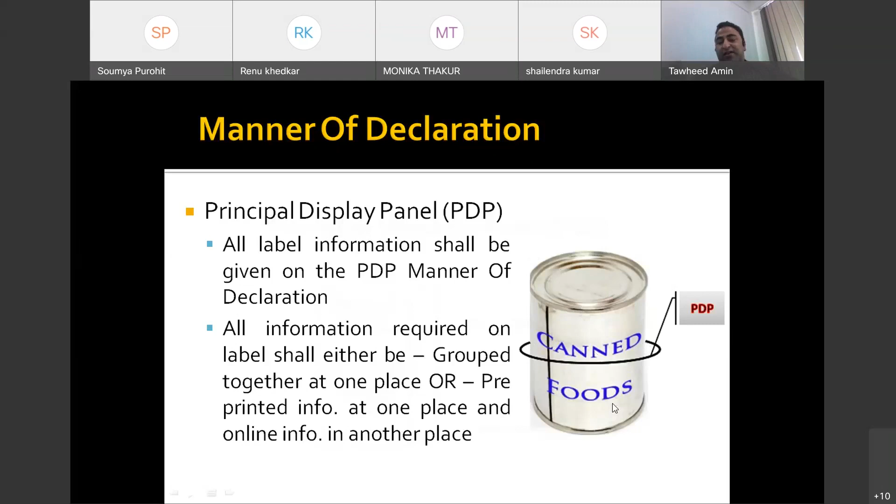See what we need to do: we need to take the largest area, we will see its height, we will see its width, and we have to multiply both, that is height multiplied by width, and 40% of that area should be the Principal Display Panel. So that is for rectangular containers. Now we have the cylindrical, or nearly cylindrical, round or nearly round bottle - we have bottles.

How much area do we need to cover as principal display panel? In this case, 20% of the product of height and average circumference. We need to take the height of the bottle, but excluding the shoulder height - that bending, the shoulder is to be avoided. So up to the point where the shoulder starts, we take the height up to that, then multiply it by the average circumference of the bottle. 20% of that product of height multiplied by circumference should be the principal display panel for a cylindrical or nearly cylindrical, round or nearly round material.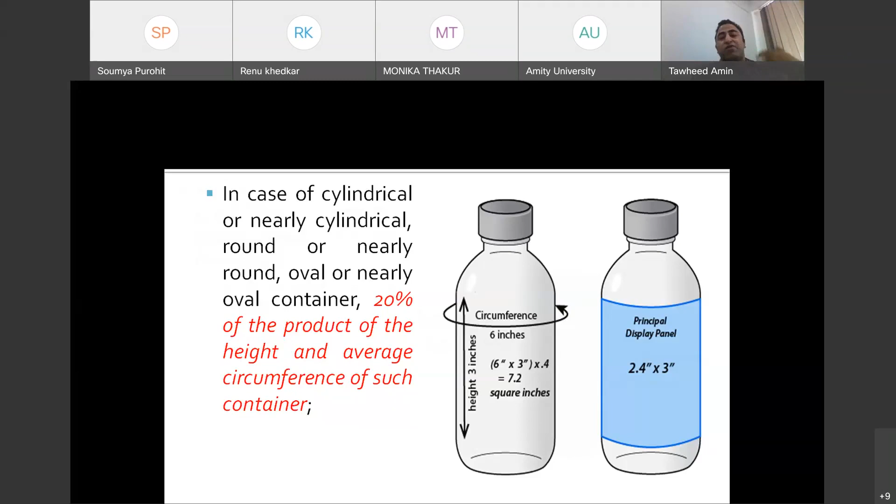Now, in the case of a container of any other shape - apart from rectangular or cylindrical shape - 20% of the total surface area should be there, or we can say it should not be less than 10% of the total surface area of the container. That means 20% has to be mandatorily there, but it should not be less than 10% of the total area. For example, if we have a very big bottle, we will keep a small label on it - that means less than 10%, it will not be clearly visible. That is why we have to keep it about 10%, or below 20%. So it should be in the range of 10 to 20% for any other shape.

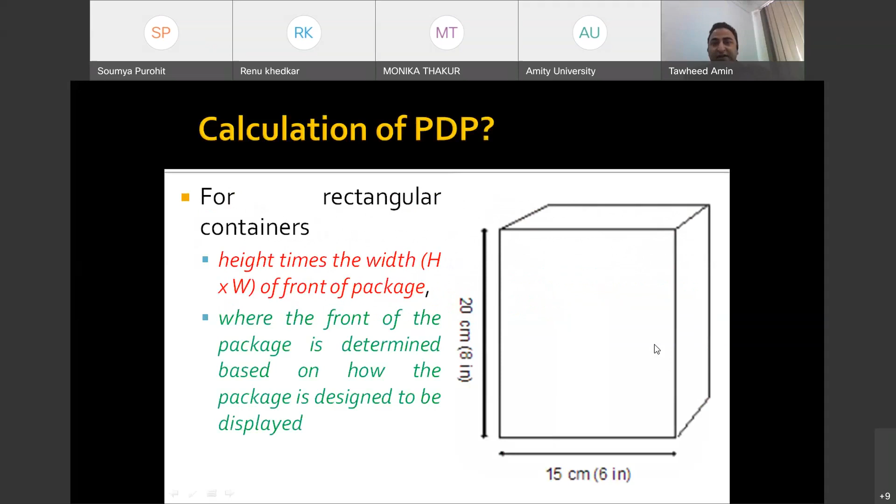Now, how should we go for the calculation of PDP, that's principal display panel? For rectangular containers, we take the height multiplied by width of the front package. For cylinder or nearly cylindrical, it's 40% of the height times the circumference - that is 0.4, 40%, 40 by 100, multiplied by height, multiplied by circumference of the container. That will give you the principal display panel, that is the area to be labeled.

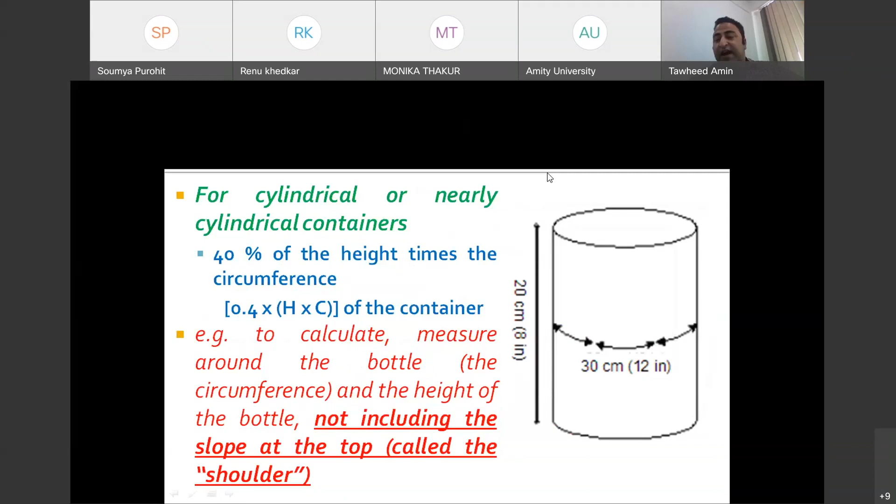For example, to calculate, measure around the bottle, the circumference, not including the slope at the top called the shoulder. It's very important that we exclude the shoulder part when we take the height. For other shaped containers, it's 40% of the total surface area of the container.

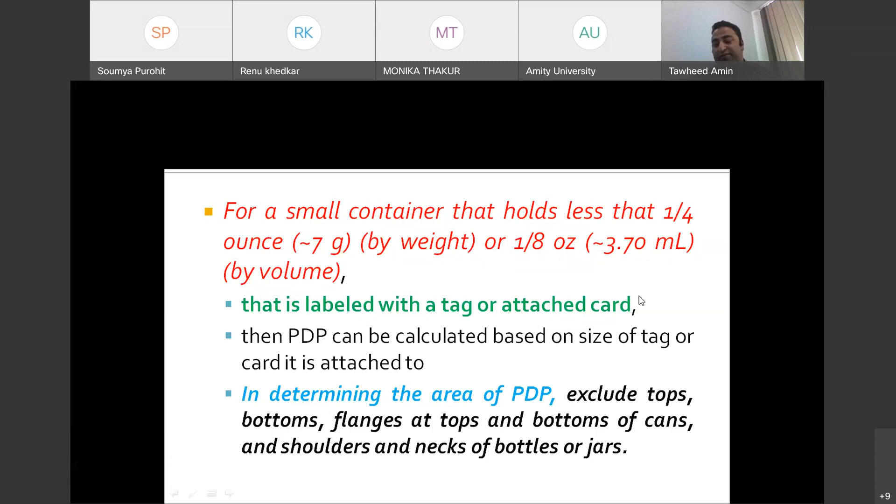Now, labeling of pre-packaged foods. The general requirements are every pre-packaged food shall be labeled with information as required under these regulations, unless otherwise provided.

Nowadays we have gone for online shopping, especially during the COVID pandemic. We are going for online shopping, and this is called e-commerce. So in that case, how should the labeling be? What's more important, and what information should be provided?

When a food product is sold through e-commerce or any other direct selling means, the mandatory requirements of the label as given in these regulations shall be provided to the consumer through appropriate means before sale, except batch number, lot number, best before, use by date, expiry date, date of manufacture or packaging. You will go online shopping, see a package of biscuits, and buy it. It should contain each and every information as per the Food Safety Standards Authority of India, except for those mentioned.

Because once you order the product, it's not taken from online stock, but it comes from a company. Once you order the product, on that day it is packed, labeled, and manufactured. So the packaging batch number, manufacturing number is to be provided on the date once it is sent to the customer, not before that. It's not mandatory that it should be before, except for some products like biscuits which have a good shelf life. In that case it can be there, but it's not mandatory.

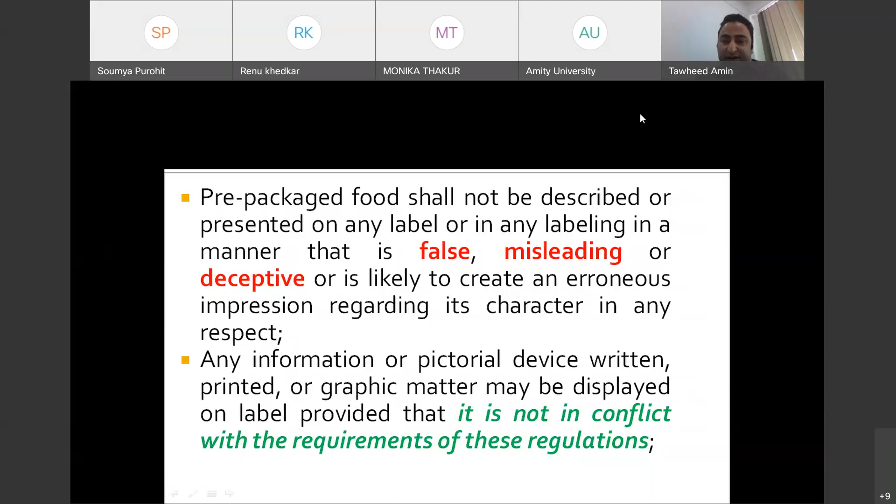The particulars of declaration required under these regulations must be specified on the label. It should be in English or Hindi. In Hindi, it should be in Devanagari script, or it should be in English.

The label on prepackaged food shall be applied in such a manner that it will not become separated from the container. Because if it gets separated during transit or transportation, the customer cannot read it, and this becomes a problem for the manufacturer. So it should be affixed properly.

Contents on the labels shall be clear, unambiguous. It should not be ambiguous. They should be prominent, conspicuous, indelible, and readily legible by the consumer under normal conditions of purchase and use.

That's why, as I mentioned with the Haldiram package or the biscuit tins, on short height packaging it's not advisable or allowed to write the principal display panel, because otherwise it cannot be clear, prominent, conspicuous, or indelible.

So where a package is provided with an outside container - for example, we have a secondary carton, called secondary package. In that secondary package, we have primary packages, like McVitie's digestive biscuits, those 10 rupee packets, usually sold in secondary cartons containing 10 packets. So whatever information is written on the primary package must also be written on the secondary package.

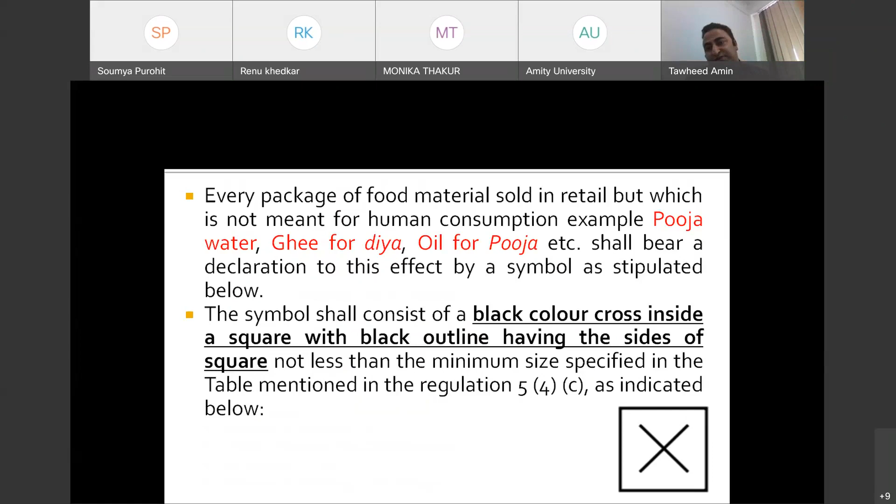This is very important. Now, label - label means any tag, brand, mark, pictorial, or other descriptive matter written, printed, or whatever is written that gives you information about the product. We should have a distinguishing mark by which food can be traced in manufacture and identified in distribution.

That is lot number, code number, batch number. Because if tomorrow there is any problem, any foodborne outbreak, any poisonous substance found in the product - like recently we had a problem with Maggi - we can see the problem is in this particular batch, and we can recall only that particular batch. If there is no problem in other batches, we may not unnecessarily recall those. We will recall only the batch which is having a problem. So it should be written over there.

Now, very important - the barcodes. We have barcodes available on the products, and how should we calculate those barcodes? That's very important. Usually the system we follow is the European Article Number 13, EAN 13 barcode. It is a 13-digit number, including 12 data digits and 1 check digit.

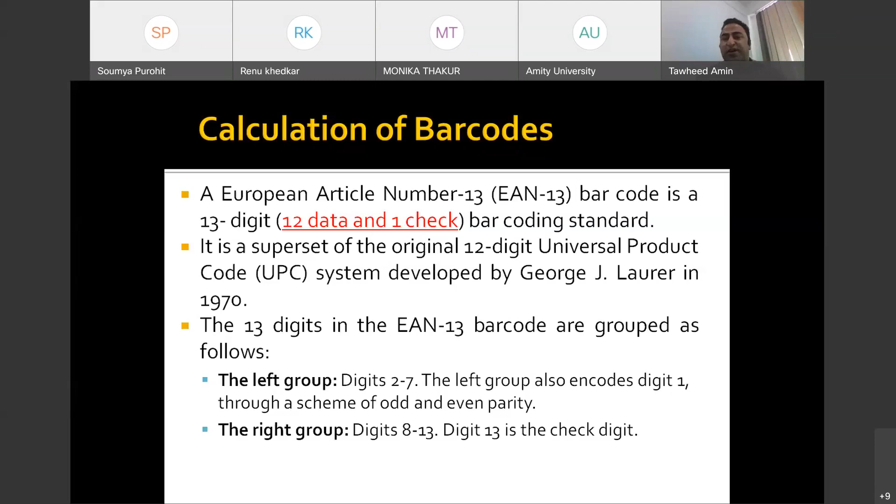The last digit is called the check digit, so it is a superset of the original. Previously, we had the 12-digit Universal Product Code system, but it has now been changed to the EAN 13 system. The last digit is the check digit, and it is the result of a mathematical calculation performed on the preceding digits in the number. You have 12 digits, then the last digit is calculated mathematically - that is what we call the modulo 10 algorithm.

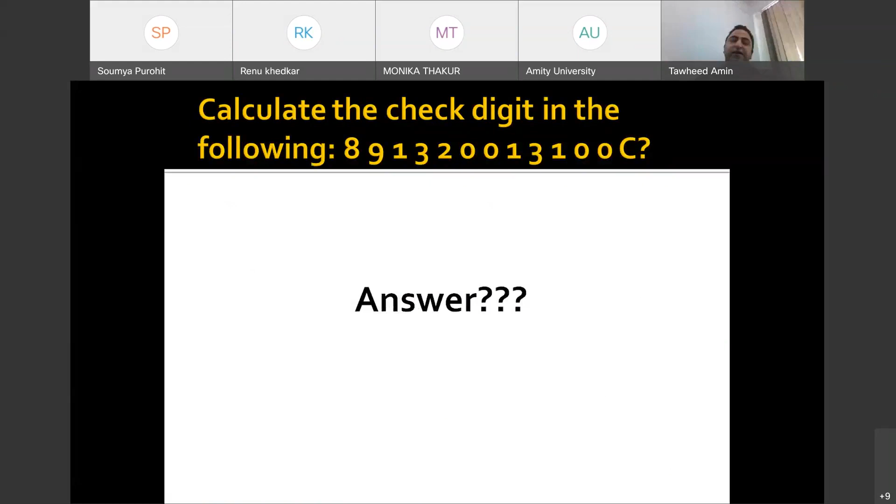So this is again kept here, we can calculate it for this also. You have to add alternate numbers, multiply by 3 for the first step, then add the number so that you can reach the next multiple of 10.

Since I told you we have the EAN 13 barcode system, we also have the EAN 8 barcode system, used for retail goods, usually for smaller items like confectionery. It's not possible to have a very big label over there, so you just use an EAN 8 barcode system.

So this is our recently published book, Testing Procedures of Food Packaging Materials. In this you have each and everything written, the calculations about the barcodes and labeling.

Then best before date and use by date, that's very important. That should be mandatorily there.

So labels must carry that, and as I told you, the label should be in English or Devanagari. So this is the label in front of you, this is another Appalam label. So you have it in Hindi as well as English. You can keep both languages, but you have to mandatorily keep at least one of them.

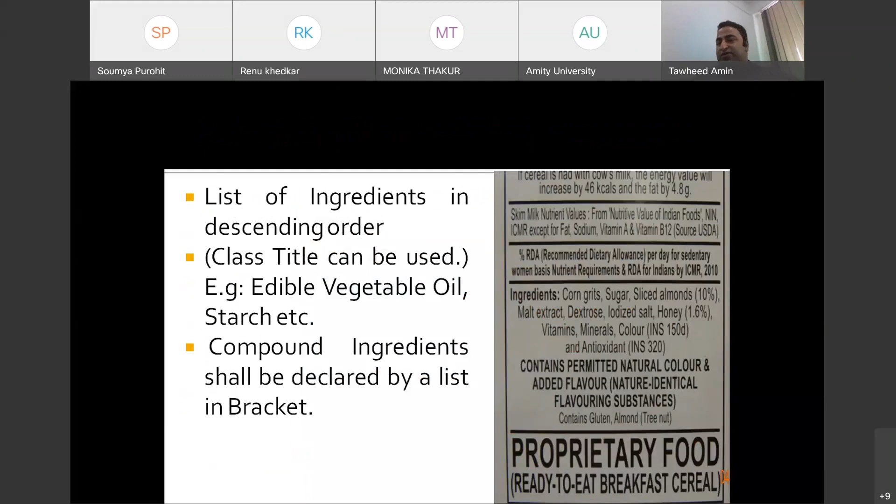That I discussed. So labeling requirements: trade name should be there. List of ingredients has always to be in descending order, meaning the ingredient present in the largest quantity should be at number 1, then the second largest on the second number, and so on in descending order of quantity.

Very important: if you have any ingredient made up of 2 or more products, you have to mention those products of which this ingredient is made up. Except if it is less than 5%, then it's not mandatory to show. But if its quantity is more than 5%, then those ingredients or compounds are to be shown.

One more important point: if you are adding water, that added water must be included in the list of ingredients, except for some products. Like if it's written brine, brine means salt in water, syrup means sugar in water, or broth, so it's clearly understood that water is present. In that particular case, you don't mandatorily need to mention water, but apart from this, you have to mandatorily mention added water.

So nutrition information, as I told you, has to be per 100 gram basis or per 100 ml basis. Energy value should be in kilocalories, protein, fats, and carbohydrates, that is macronutrients, have to be in grams. Then you can have milligrams or micrograms for all other vitamins and minerals.

If you are claiming about saturated or unsaturated fats, that should be mentioned, monounsaturated and polyunsaturated fats too, like you can see on the label in front of you. Trans fatty acid percentage also has to be mentioned. It has been made mandatory now, because trans fats are usually formed during hydrogenation of vegetable oils, and hydrogenated vegetable oils are being used frequently in the industry, so there is a possibility that trans fats are present.

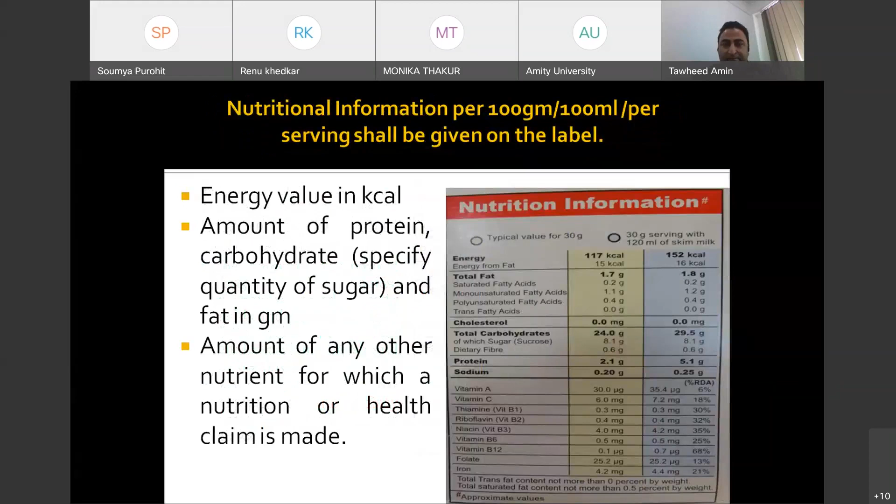Nutritional information is not necessary for some products. It's not mandatory for raw agricultural products like apples, pear, grapes, table salt, sugar, jaggery, non-nutritive foods, packaged drinking water, alcoholic beverages, fruits and vegetables, pickles, papad, ready-to-eat food, and food shipped in bulk which is not for sale as such.

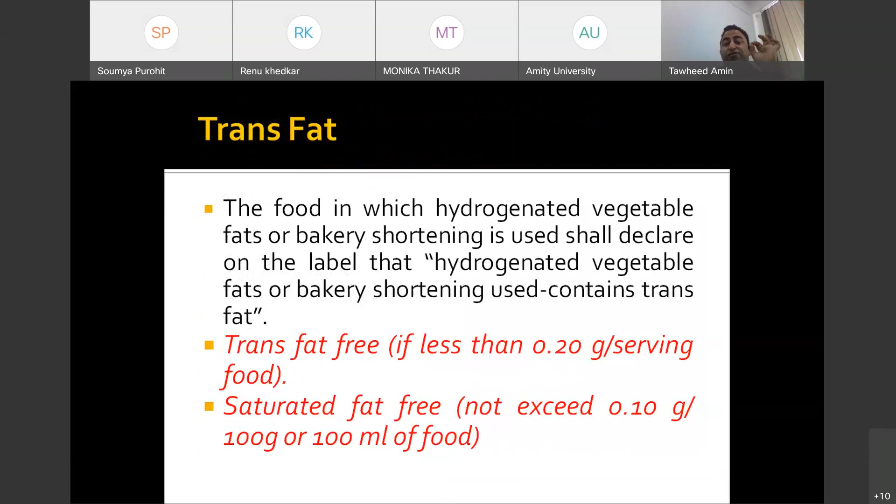Regarding trans fats, you can claim trans fat free only if trans fats are present less than 0.20 gram per serving, or you can write saturated fat free if it does not exceed 0.10 gram per 100 gram or 100 ml of the food product.

Health claims should only be mentioned if proven. You cannot write that it prevents cancer or lowers cholesterol unless proven. Containing a vitamin or mineral does not automatically mean it has a health beneficial effect - it should have a proven physiological effect. If you claim something is anti-diabetic, it should retard or inhibit the activity of alpha amylase and alpha glucosidase in the body, and this must be proven by scientific claims.

This is the veg and non-veg logo, but it has recently been changed from a circle to a triangle shape, specifically for blind or specially abled people.

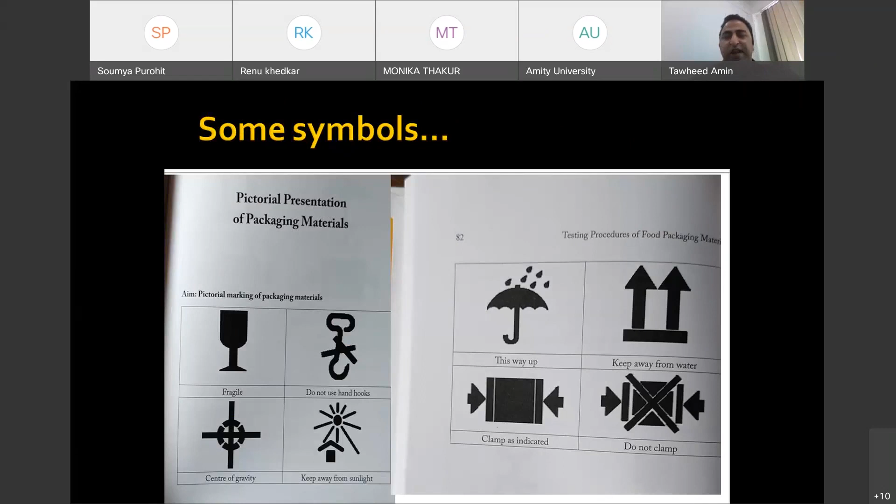Food additives and flavors must be mentioned, and these are some symbols usually present on labeling material, like fragile, do not use hand hooks, and keep away from sunlight.

So that's all, thank you. I would have talked much more, but keeping time into consideration, any questions are welcome.